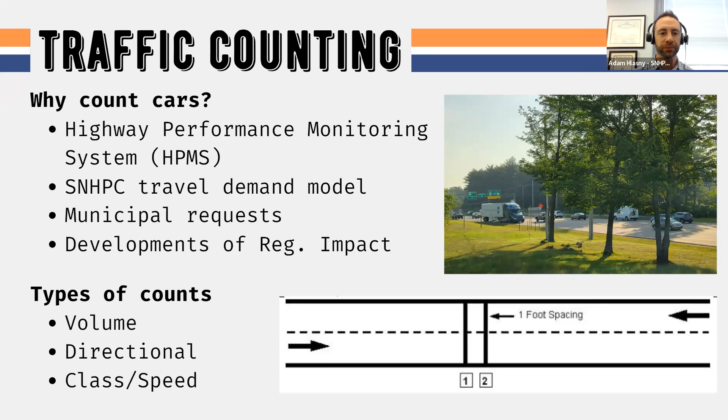Speed counts are another type that we do, often municipal or local requests to have a speed study done. On the left here, you see a map of our 2022 counts. We have about 1,200 total count sites, and they're on a 3-year cycle. So we do about 400 a year, roughly half DOT and half for the SNHPC model.

The field season began about 2 weeks ago. We start right after the snow melts and go right into November. We do roughly 20 counts each week, and we often get 17 or 18 of those that are successful. Usually a couple come up for various reasons—street sweepers sometimes knock the tube out, so we have to redo some—but we generally get about 18 successes a week.

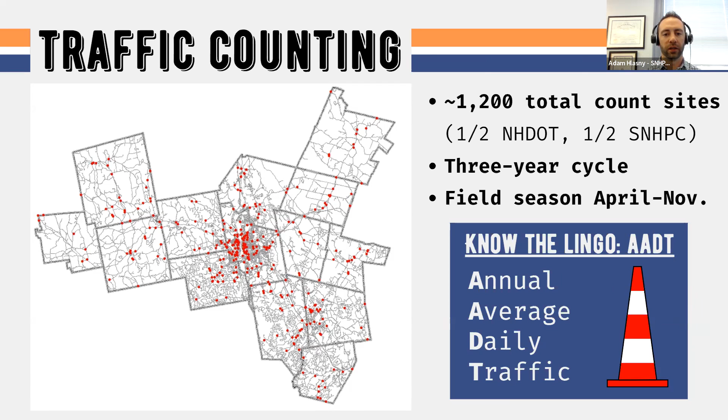AADT is the annual average daily traffic. That's the standard measurement of how many vehicles use a specific stretch of roadway in a given day. That's how we measure and compare the AADT across any count in our region.

This is an example of a field sheet that we take out with us. I prepare these every week. We have a list of the locations, as you can see here. We put the AADT on the sheet, so the folks installing the counts have an idea of what to expect when they're out in the field.

It's a safety precaution, as well as when we download the data, we can see at a glance how close we are to the past AADT. So if we're counting a road that 3 years ago had only 1,000 vehicles and we get 3,000 this year, chances are something went wrong with the count and we have to redo it. We typically try to get within 10 or 20% of the volume of the previous year.

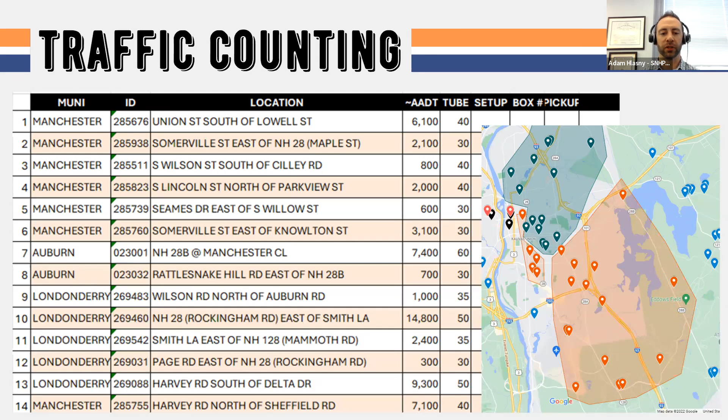Over here is a map—I tend to print these out before each week of counting. Before we head out, we make the most efficient route so the field team doesn't waste time looking for the best way to go between all the count locations.

So we have a traffic count web map. If you go to our website, here's how you would find it: it's under transportation, traffic counts, and then there's the web map. I believe this will take us there. For those of you who haven't seen this before, this is all of the counts that we do in our region. They are color coded.

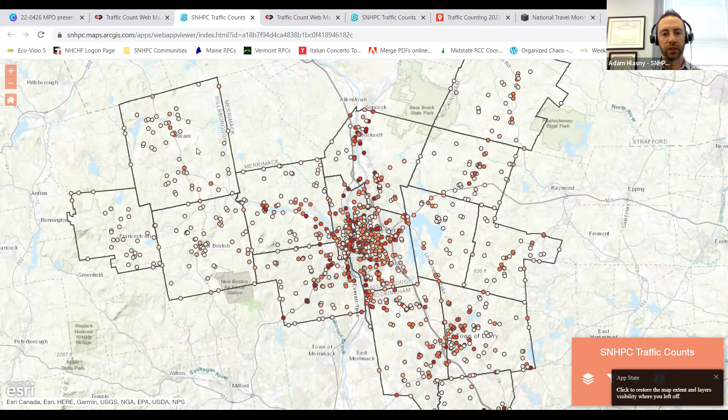The darker the red color here, the more volume. So I'll zoom in. And if you zoom in far enough, you can see the AADT on each count. You can see 1,500 here, 6,900. And I will show you one example that I find kind of interesting.

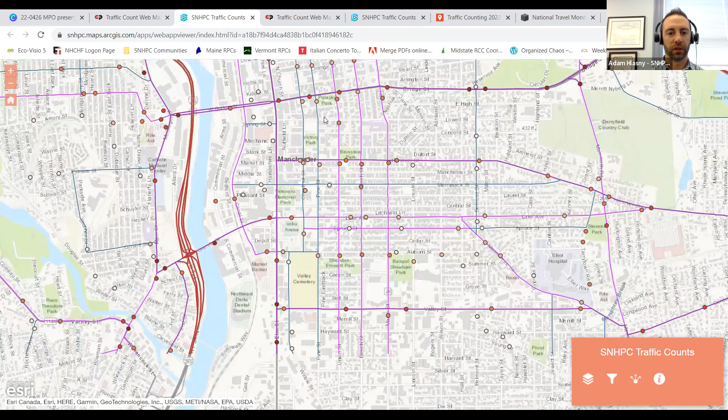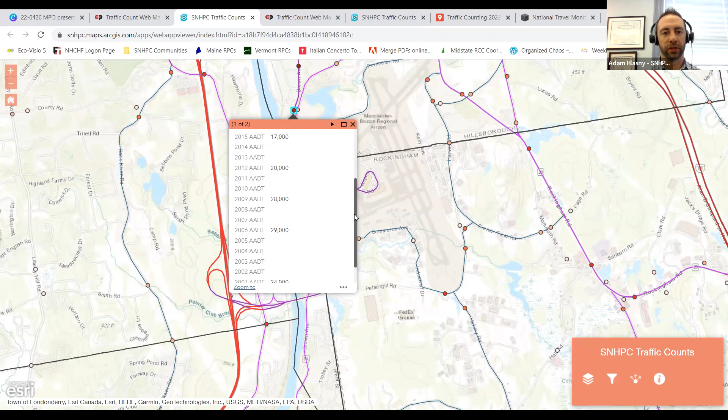Down here on Brown Ave, we have data that goes back all the way to 2000. In 2006, we had an AADT of 29,000 vehicles. After the airport access road, the Raymond Wieczorek Drive, opened, you can see the volumes went way down to 17,000 in 2015, and then it started to rise again in 2018. The 2019 and 2020 data are on their way—we don't have them up on the website just yet, but they're coming soon. This is an example of how this captures trends from the past couple of decades.

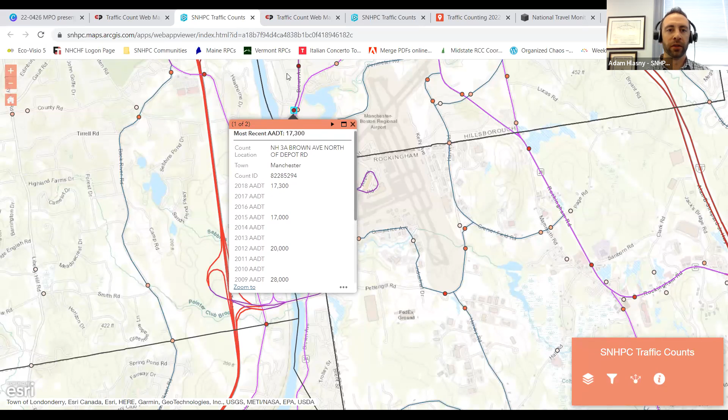Why do we count? Capturing seasonal trends—some of the trails I'll show you in a moment fluctuate quite a bit season to season. Also to justify investments in infrastructure or support grant applications, and to gauge event attendance. For instance, we've counted at the Manchester Car Show on Elm Street, before COVID obviously, to see how many people were attending that event.

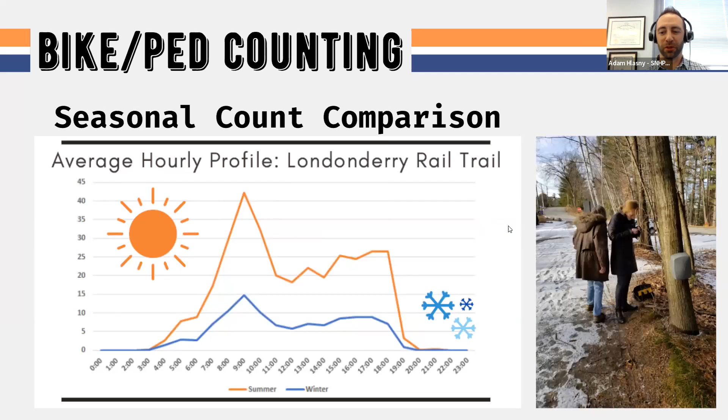And the picture - that's from Goffstown, I recognize it. It is, that one tree. We didn't have a Londonderry photo that I was happy with, so I just threw that one in there. Nice.

As I said, there are 3 tiers. We're going to count the top 10 annually, or preferably more than once a year, but at least annually. Tier 2 is biennial. Tier 3 is sometimes a one-off town request or something we did that's not as popular a site, so that will just be as needed.

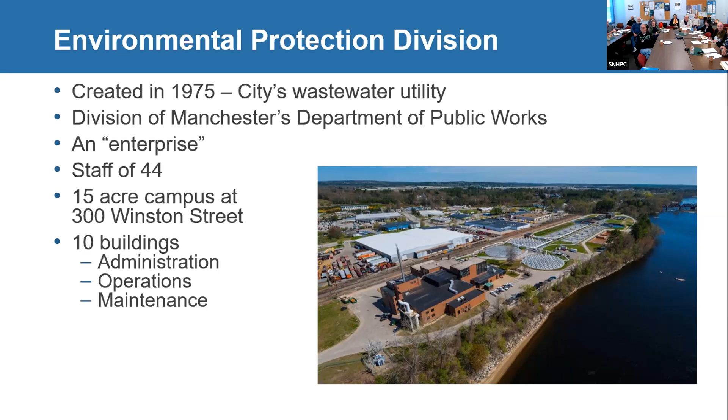I mentioned I'm the Chief Engineer of City of Manchester's Environmental Protection Division. That's really the city's wastewater utility. We were created in 1975 and we're a Division of Public Works. We're an enterprise, meaning we don't take any tax dollars. We're financed from our sewer user rates. We have a beautiful campus at the banks of the Merrimack, 15 acres, 10 buildings, staff of 44, admin, ops, maintenance. We're all down there along the beautiful banks of the Merrimack.

Hey Fred, maybe you should very quickly talk about the use of your effluent as cooling water. Oh, I could talk about that, since you like that, I'll go back to that. We're really a water reclamation facility. Peter mentioned about reuse, but I stated the most important reuse: we put all our water back in the river, and 500,000 people take that water out and use it for drinking water. That's a great accomplishment. What Peter mentioned is we actually have a secondary use, in that there's a power plant in Londonderry, a gas-fired power plant, that takes, using the measurement MGD, million gallons a day, 5 MGD from us to use for cooling water. To put that in perspective, that 5 MGD is bigger than 98% of the treatment plants in northern New England, so it's a very large volume of water. The best thing about it is we double dip on it: we sell them that water, about 75% evaporates, 25% comes back in the sewer system, and we charge them again. So it's a win-win situation.

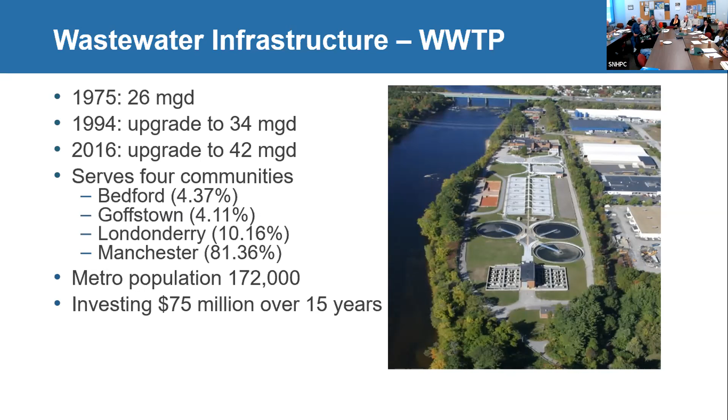Again, we have to get all the wastewater to the treatment plant. So we have 390 miles of sewer. The technical term we use for that is a lot of pipe. A big thing about it is over 100 miles of it is over 100 years old, and we'll talk about that old infrastructure that we have.

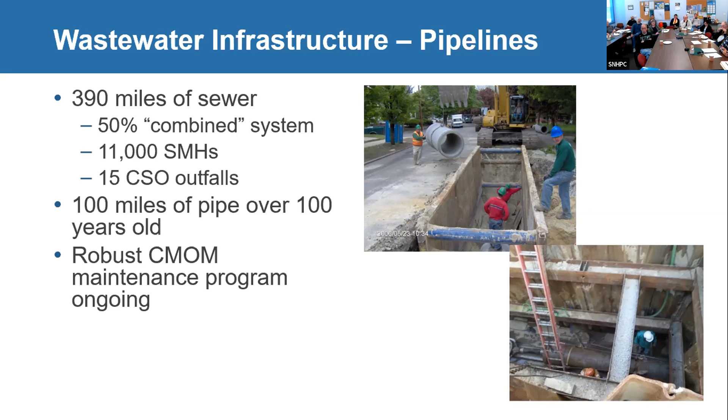But I'm very proud to say we have a robust program we call CMOM. It's a maintenance program for the sewer. We invest about $3.5 million a year in maintaining that system, and that's a sustainable program. We're in year 12 of it. We take great pride in sustainability, because that's very important in our business culture, in our industry. So we have a very robust maintenance program.

We also have to get the flows to the plant, so we have a bunch of pump stations. We have 12 of them out there, from little tiny stations to huge stations, old stations from the mid-70s to recent ones, all part of our infrastructure.

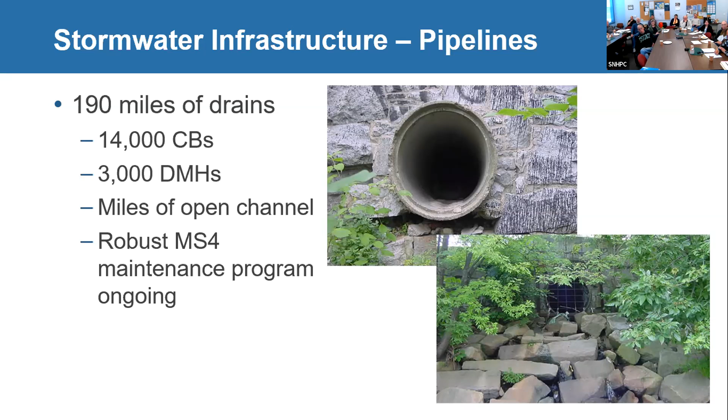We also take care of stormwater or drainage for the city. That's yet another 190 miles of pipe, 14,000 catch basins, 3,000 drain manholes. Again, a ton of infrastructure for us to own, operate, and maintain. But similar to CMOM, we have a robust maintenance program ongoing for stormwater, called MS4. We're mimicking the success we've had at CMOM, and I'm very proud, we're on year 5 for MS4. So again, sustainable maintenance programs.

We also have several urban ponds in town and waterways. Believe it or not, through MS4, we are now regulating the water quality in these ponds. We have Crystal Lake, Dorrs Pond, Pine Island Pond, Stevens Pond. Stevens Pond is my favorite. If you know where it is, it's right where 93 and 101 meet, and there's a pond underneath. All that waste from the road discharges into that pond, but they want us responsible for water quality. So again, a huge challenge there.

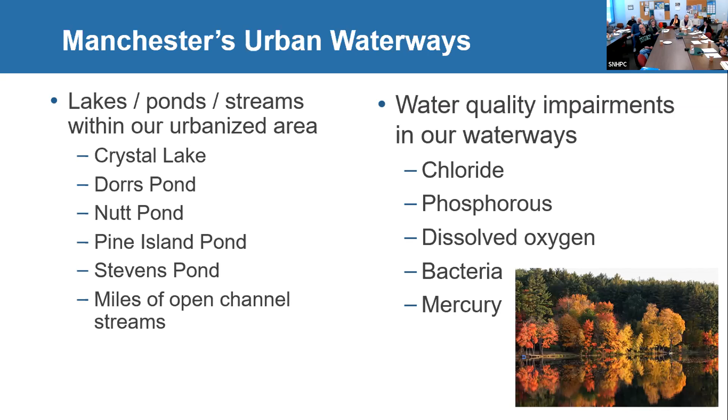Impairments, chlorides, that's salt. Where's all the salt in Stevens Pond come from? Route 93 that goes over it. Phosphorus, dissolved oxygen issues. So a lot of challenges.

So when I talk about infrastructure, let me put it in perspective. In the city of Manchester, we have over 1,000 miles of buried pipe. That's from here to Boston 10 times. Manchester Water Works has 500 miles of water main. Public Works has 190 miles of drainage. EPD has 390 miles of sewer. That's 1,000 miles total.

250 miles of that is over 100 years old, aging and failing infrastructure. That equipment has reached the end of its useful life. Do you have any appliance at home that's lasted 100 years? I think not. And again, this is buried in some pretty harsh environment.

So look, Fred, that doesn't even count the gas mains that are under the city streets. That's correct. The conduits carrying telephone conversations and data. All important infrastructure, private infrastructure for all the utilities, but you are equally as important. And you hear all about aging and failing infrastructure with bridges and roads.

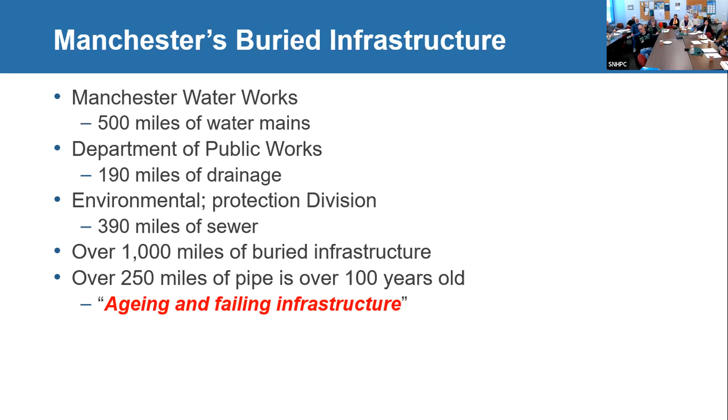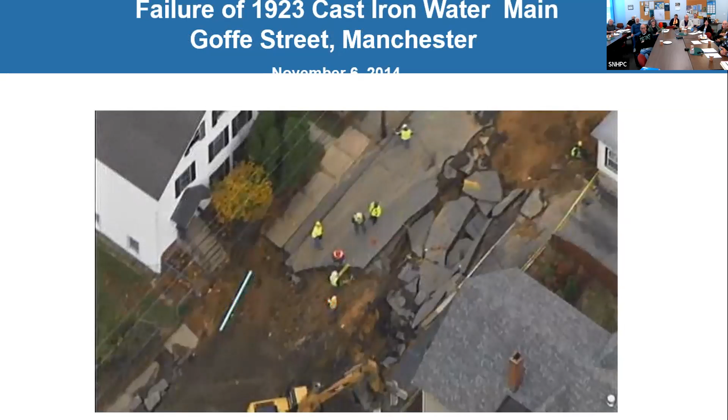Well, let me show you what our aging and failing infrastructure looks like. It looks like a road collapsing like that. This is a 1923 cast iron main failing in 2014. That's the overhead view. I like the up close and personal view. That looks like a war, does it not? So again, that's a failed water main.

Millions of gallons came gushing out of that, very high pressure. Not only did it take out the road, as Peter mentioned, every utility in that road we had to replace. Gas, sewer, drainage.

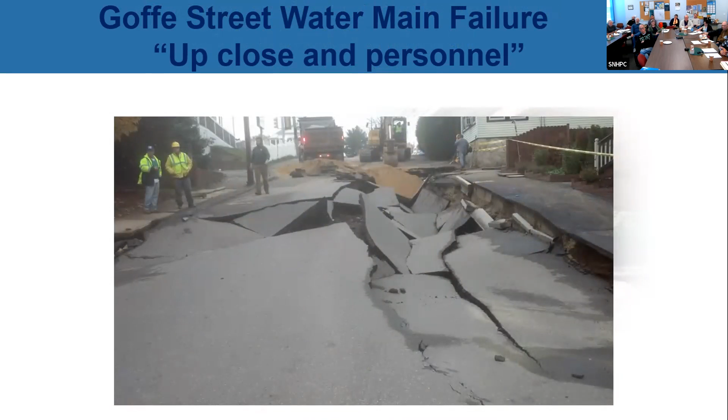This was Kennard Road near McIntyre ski area. Poor guy's going down plowing, all of a sudden bang, he goes in the sinkhole. Again, a failed water main. It took 2 heavy-duty tow trucks to drag that baby out because it was full of sand. Imagine how hard it is, and it's in the middle of winter, you're freezing cold. Nothing easy.

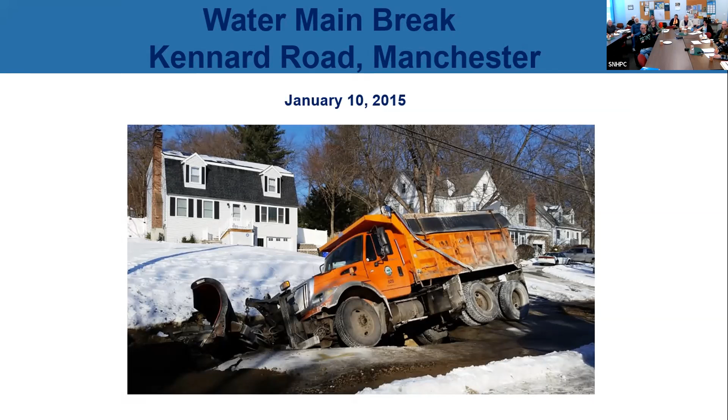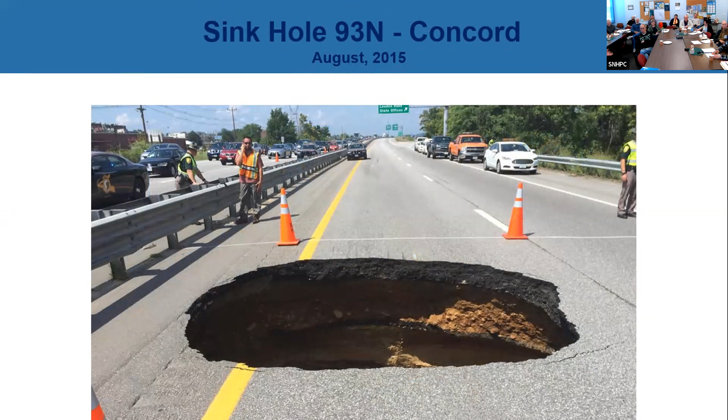This is Route 93 in Concord. Can you imagine that? We actually have pipes under the Merrimack, and we're working now with DOT to rehab one this spring because we want to prevent this. I mean, you had to shut down 93 North. What kind of catastrophe is that?

And as Peter knows, Murphy's Law, when does that pipe break? Memorial Day weekend or something, right? What kind of catastrophe would we have Memorial Day weekend if we had to shut down 93 North?

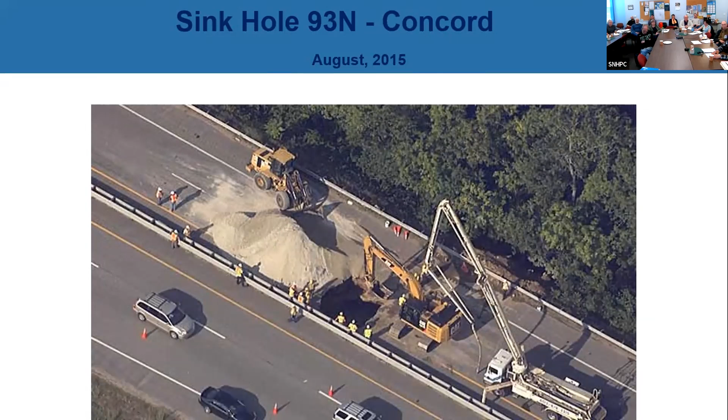This is my favorite from Manchester. Imagine being the poor guy in the red car, waking up in the morning, going out and saying, what happened there? Water main break in 2012.

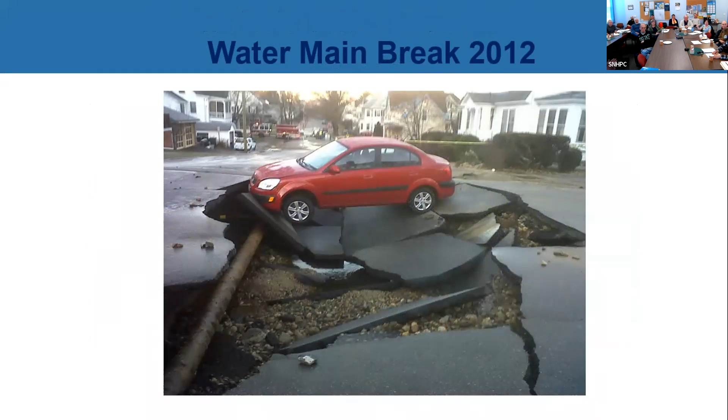So that's infrastructure, aging and failing infrastructure. That's one of our themes you should take away from here. The other theme is the state of the state. What I did was merge a couple of presentations to enlighten, inform, and entertain.

The biggest things our industry faces: aging and failing infrastructure, and increased regulatory requirements. Everything we do at EPD is regulatory required, and we'll talk about that in the CSO work. MS4 permits cover phosphorus and everything in the ponds, federally regulated. CMOM is also a federally regulated program. So everything we do is federally regulated and mandated through more and more regulations.

Let me get on my soapbox a bit. We've all heard about PFAS. They're measuring that in parts per trillion. Can you believe that? Think of a sandbox in parts per trillion. Our science has advanced so much we can detect things at parts per trillion. What people don't realize is how costly it is to clean this up. People hear PFAS is bad for you, causes cancer, and we want zero. What they don't understand is zero is going to cost billions and billions of dollars.

Climate change, need I say more? We see that each and every day here. I've been at EPD for 16 years, and I've seen not one, not two, but three 100-year storms. I think those are supposed to happen once every 100 years. I don't know what's happened, but I've seen three in my time, and unfortunately, I see a little more coming.

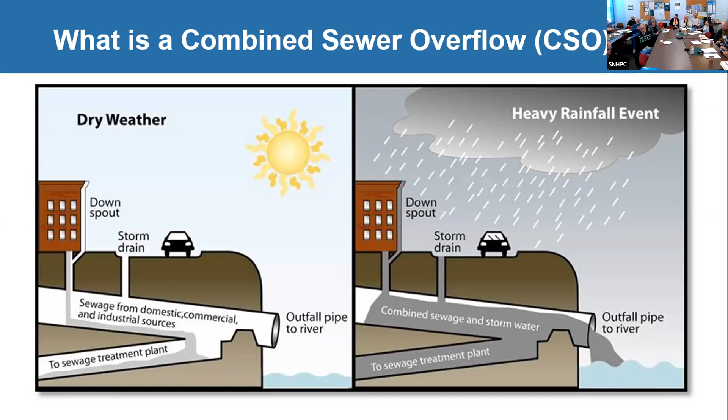There was no consideration of water quality or environmental stewardship in those days, and so the city of Manchester is faced with this, like a lot of other communities in the country. I get a little too animated here, you see, I get excited about this work. You asked me to make sewer sexy, I'm trying to do the best I can. So this is what a CSO really looks like.

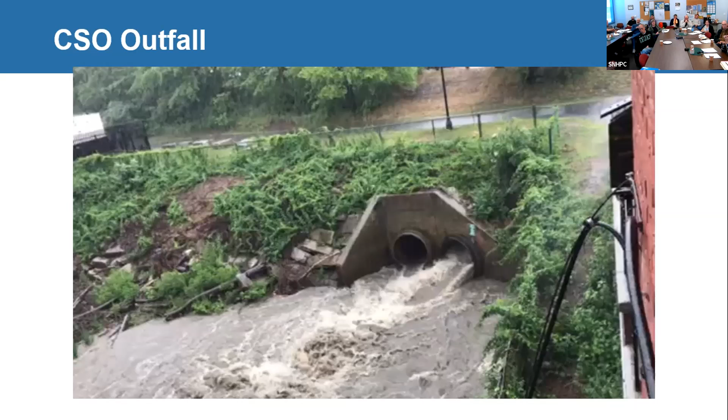That's a pipe right down in the millyard, discharging to the river, sending a combination of wastewater and stormwater. But let me tell you, when this pollutes, it's really what we call the first flush, because what comes out first contains all the sewage and drainage. All the water that comes out after that, 95, 98, 99% is stormwater, clean water. And the Merrimack River, believe it or not, can assimilate that type of pollution. We'll talk about that a little later. Well, that's what a CSO really looks like.

So our CSO history in Manchester: in 1994 they passed the Federal Clean Water Act CSO control policy. All these cities up and down the East Coast that were developed in the 1800s had to deal with this through mega projects. Like anyone, we did a bunch of engineering studies in the mid-90s, and then in 1999 we signed a federal consent order, a legal agreement with the Department of Justice, Environmental Protection Agency, and the city, that we would clean up these CSOs. It was a two-phase program: the first 10 years we worked up and down the west side of the Merrimack, and after that we did the east side.

So phase one was on the west side, 1999 to 2009. We had a nice office right down on Kelly Street. I remember Pete at many of those meetings there. Yes, with our friends Rich Davis and the guys.

So in 10 years, we spent $58 million on this program. We separated 15 drainage basins, 8 construction contracts. We rehabbed and replaced 53 miles of pipe. Think of that, it's from here all the way to Boston. A ton of pipe. What we really do is build a new drainage system, and the existing system was used for a sewer. So a massive 10-year, $58 million program.

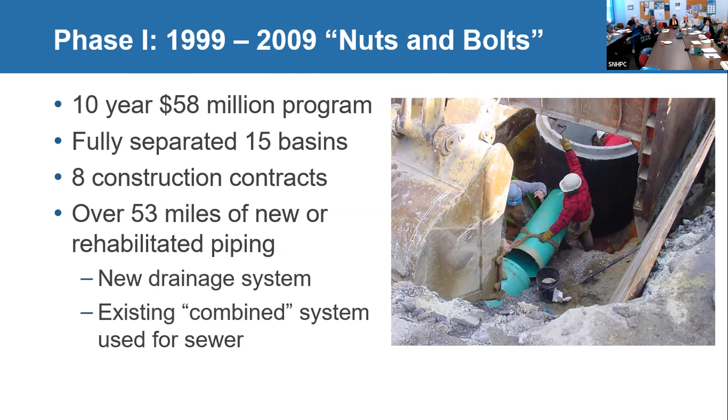And it was wildly successful. We reduced CSO discharge to the Merrimack River by 99%. We were only ordered by the court to get, this is an engineering measurement, a level of control. We're supposed to get a 3-month level of control. We got a 2-year level of control, meaning that our CSO should only discharge once every 2 years. Wildly successful, improving Merrimack River water quality. And most importantly, done on schedule and on budget. With the amount of projects we do, that's critical.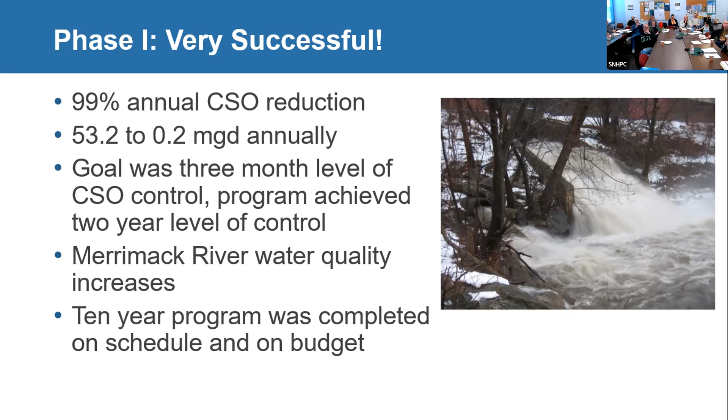But not only do we have the nuts and bolts, the concrete benefits, we end up with 26 miles of road reconstructed. 9 miles of new water, 14 miles of gas, 8 miles of curbing, 6 miles of sidewalk. So we're not talking small amounts. Just to walk 6 miles of sidewalks is a long walk, right? That's gonna take you a couple hours. A lot of sidewalks, all handicap pedestrian ramps.

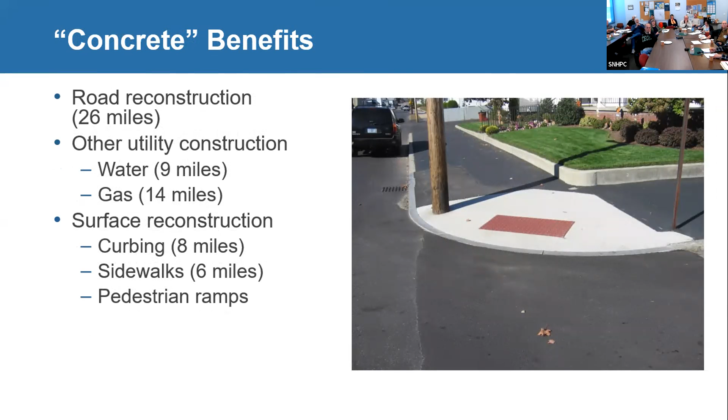So great concrete benefits, but we focused on more than that. Social benefits. We just don't want improved water quality. Like a lot of places, environmental justice is the new buzzword. You look at anything coming out from EPA, it's got environmental justice in that. But before that word was invented, I called it urban revitalization. We went into these inner city areas and improved them, used green infrastructure, ADA compliant, a positive impact on the local economy. So all social benefits, in addition to those concrete nuts and bolts that I shared with you.

So now we're done with the west side, it's time for phase two, go to the east side. I remember this, I was all pumped up. Peter remembers it probably. We finished the west side, we're gonna go kick ass on the east side. Let's go, let's go. We went into EPA with a two-phase program. Phase two is gonna be 165 million, phase three 220 million. Again, follows successful themes: infrastructure upgrades, urban revitalization, social justice.

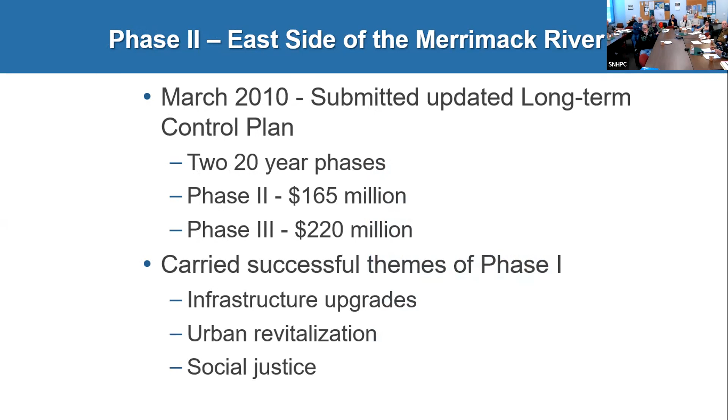But you know what, EPA, as they often do, didn't do anything. When I say didn't do anything, we spent almost $2 million on this big plan and report, and they didn't approve it, they didn't review it, they didn't do anything. We could not move forward without their concurrence. We weren't gonna make that type of investment. So we really had minimal interaction with EPA over the next 6 years. But we knew we had a long road in front of us. We knew we were gonna have to complete this work no matter what.

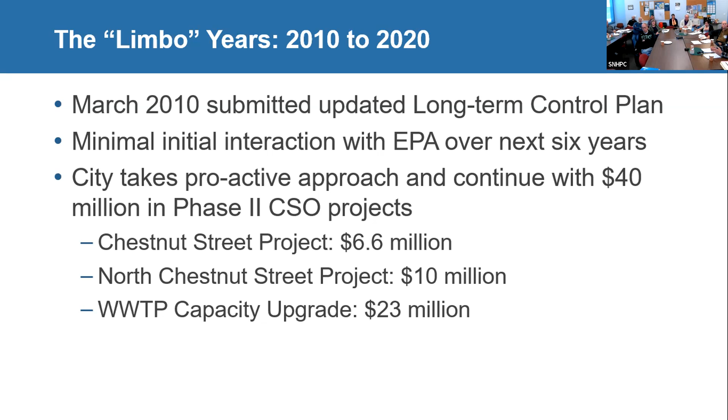So we moved forward with 3 contracts that we knew was gonna happen. We did the Chestnut Street project, the North Chestnut Street project, and then a project at the wastewater treatment plant. I don't know if you remember Chestnut Street, we actually started on Valley and went down Willow, then hopped on Chestnut and went all the way to Bridge Street. That took 5 years. Again, indicative of our projects and our culture, very slow moving, but a successful project.

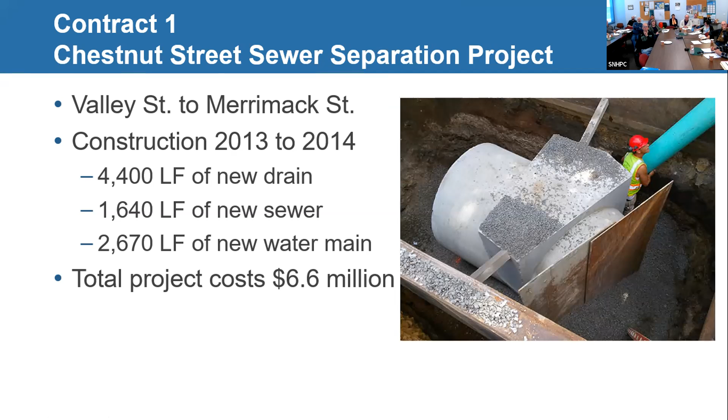From Valley to Merrimack Street, again, 4,000, 5,000, 6,000, 7,000, 8,000, close to 2 miles of various pipe, all down Chestnut Street. And this was big pipe. 72-inch OD, that's over 6 feet. The technical term we use is big ass pipe. That's what this is. We're 24 feet deep, right in front of the Verizon. Again, that took a tremendous amount of coordination.

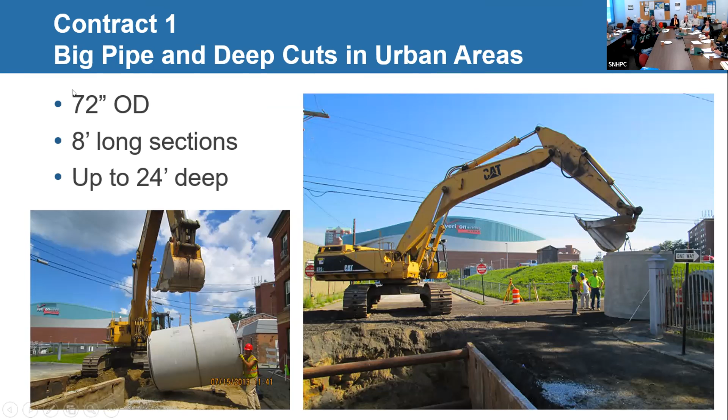I mentioned you can't close 93 on Memorial Day weekend. Verizon had all their events. We worked very closely with them to make sure traffic got in and out. But when you have a hole 24 feet deep, that's a big hole, and you're putting pipe 6 feet in diameter in. Again, all big stuff.

Here's another picture of it. This is actually contract 2, where we went from Merrimack Street all the way up to Bridge Street. Again, 3 years, $10 million. I'm getting a headache, 15,000 feet, 17,000 feet of blue pipe. So that's 3 miles of various pipe within that project.

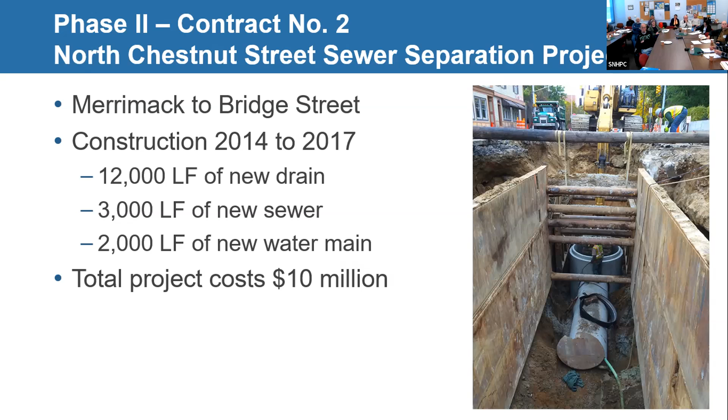Again, we leveraged this project like we did all of them. We talked about bike lanes earlier - the first bike lanes in the city were done under this project, and we leverage all these projects to build on that. If you see the bike lanes on Mammoth Road that start at the 293 overpass and go all the way to Londonderry, that was an EPD project. If you see the bike lanes on Wellington Road that go all the way to exit 1, those were all done on an EPD project. Again, we try to leverage our dollars, and bike lanes are a great example.

But again, complete infrastructure upgrade - new water, gas, fiber optics, decorative crosswalks. You go in front of the Palace Theater, those nice fake red brick crosswalks? We did those. Again, when we put something back together, we want to leverage those. Even here on the west side, behind Wolf Park, I was so proud. When I was a kid, there used to be horseshoe pits back there. I went back there, we revitalized it when we went through with a pipeline. So again, we try to do the best we can for the city.

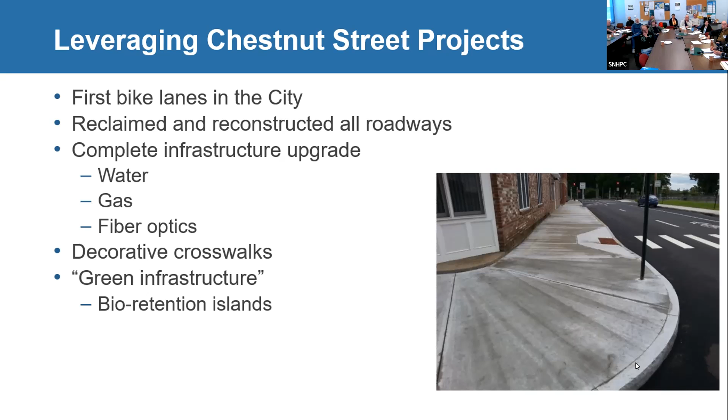We did a big project at the treatment plant. Again, I say regulatory driven - this is to remove phosphorus. This is part 2. It's costing us $25 million to remove phosphorus before we discharge into the Merrimack River. Again, for those who don't know, phosphorus is a nutrient that promotes algae growth. I haven't seen any algae in the Merrimack River, and I've lived here a long time.

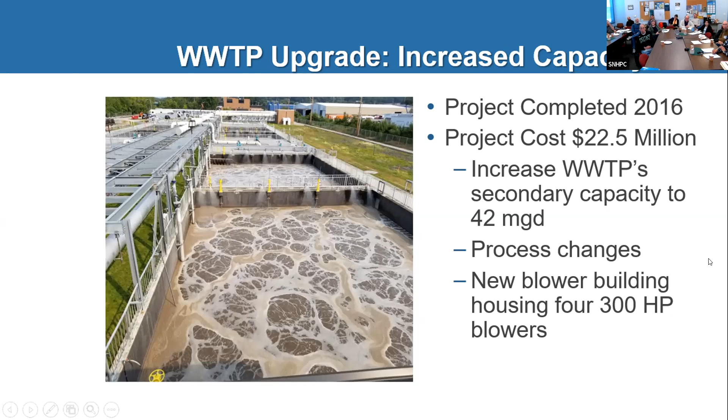We'll talk about the financial viability of some of these regulatory requirements. But either way, we have PC Construction - I was at the monthly progress meeting today at the plant, a 3-year project, $25 million, trying to keep that on schedule and on budget. So phase two negotiations, just going through a 10-year time frame. We submitted the long-term control plan in March of 2010, and it's September 28, 2020.

So 10 and a half years later, we finally have a signed consent decree. Again, that's how slowly these wheels move at times. But as I said, we were proactive at the beginning of it, so we got a few contracts done. But finally, 2 years ago, we had a concrete program. So now that phase two that we said was gonna be $160 million - 10 years later, look at that number, a lot more than 160 million. And I'll get into why that number is so big.

Well, the reason it's so big is the first number under it, the $191 million - that's for a big tunnel we're gonna build that I'll get into in a minute. But again, $190 million for the Cemetery Brook tunnel, $80 million sewer separation, $30 million Christian Brook, $25 million to wrap up that phosphorus project, $6 million in assessments. So again, it adds up to $338 million. That is a mega project, one of the biggest projects the city's ever undertaken in its history, period.

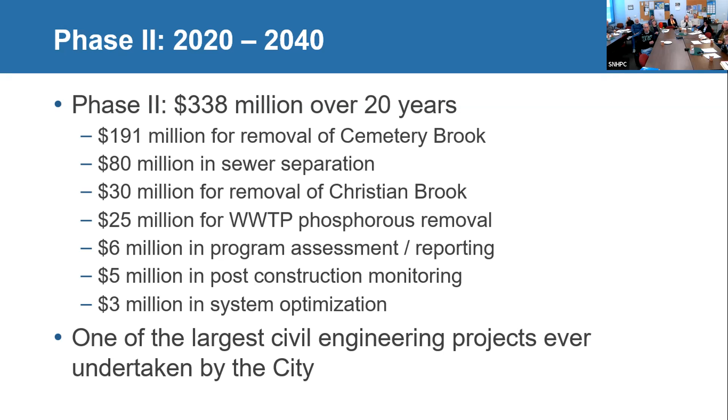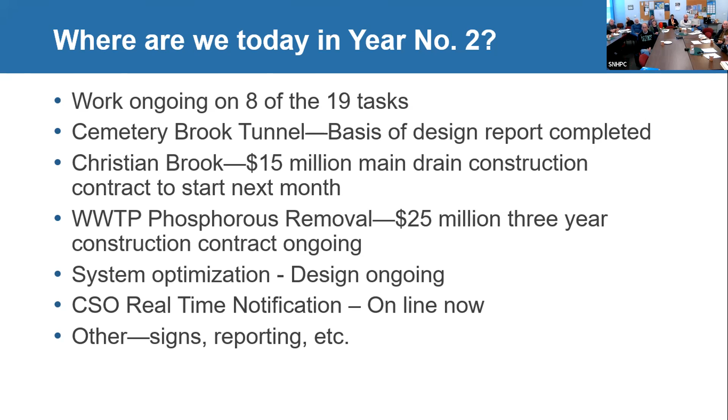So now we're in year 2 of this, and where are we? Well, I'm knee deep in paperwork - if you go to my office, I've got reports and drawings and contracts everywhere. So that proves there's a lot of work going on. Cemetery Brook Tunnel - we're just literally submitting to the EPA the basis of design report as I speak. And I'll share with you, because that's really the crown jewel project of the CSO program. The phosphorus removal I mentioned is ongoing at the plant with PC Construction. System optimization - it's just a tiny $3 million project that's going to require us to dig a 25-foot hole between Fisher Cat Stadium and the Merrimack River. So again, just another simple project we got to do there. All kinds of other things.

As I mentioned, the crown jewel is really Cemetery Brook. I had started at Stevens Pond talking about this - let me go back. Cemetery Brook is the largest drainage basin in the city, covering 4,500 acres. It creates the most CSO discharges around. Stevens Pond is where Cemetery Brook starts, and that's a natural drainage basin for the city. It goes right down the 17th hole at Derryfield, goes under East Side Plaza, under Mammoth Road, and is underground through the rest of the city.

Let me highlight it right from there - downstream from Mammoth Road is the Elliot Hospital. The Elliot Hospital has a parking garage off of Massabesic Street. That parking garage actually straddles Cemetery Brook - it's in the ground underneath the ground level parking. And it is super high. If you're ever in that garage, next time, think about it.

It's super high so that an excavator, a construction crew can go into that parking garage and dig down to Cemetery Brook, at least that few hundred feet that's straddled by the parking garage. So that's a level of detail we go into, and as Peter mentioned, we work with the developer on that specific height so we could go in and work on that.

And again, we want to be accommodating. Do we want to say no to an expansion at Elliot Hospital? No way, right? We want to work with these guys on that. And actually, the new Hilton Tru Hotel downtown off of Commercial Street, exact same thing. They're over the edge of our CSO regulator, and again we work with these people. We don't want to inhibit the development of the city, we want to promote it.

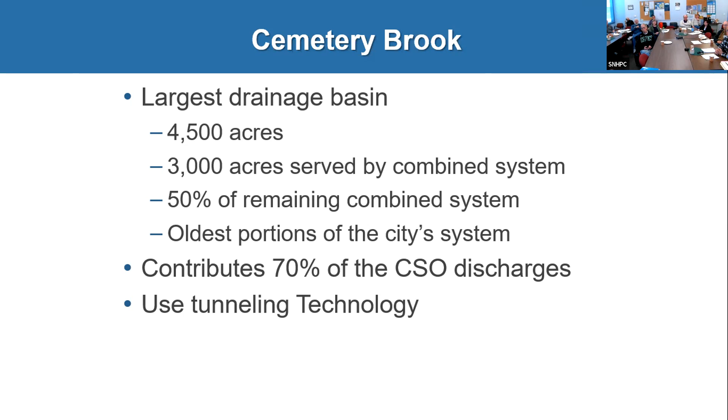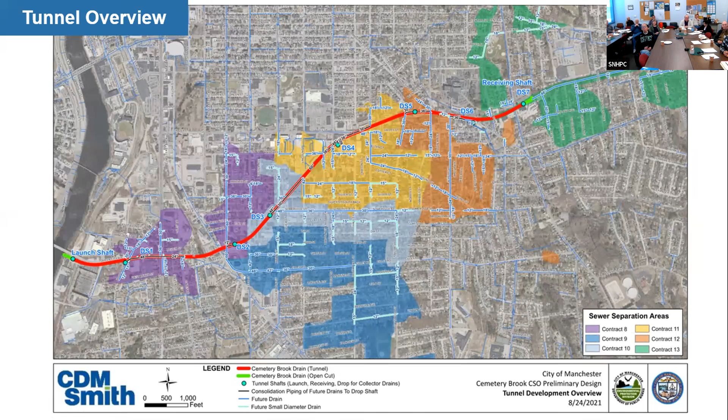Because this is such a big project, the easiest thing for us to do is build a tunnel. So we're building a tunnel. What's the tunnel look like? Well, it's going to start just south of the Queen City Bridge and go underground for almost 2 miles. It's going to pop up just east of Mammoth Road, next to the old CVS, which is across the street from the new CVS. So that's 2 miles, and now let me put things in better perspective.

So that tunnel is going to be 12-foot diameter - that's even bigger than this ceiling. It's going to be 30 to 80 feet deep, so again that's an 8-story building. That's going to be a big, deep tunnel. It's going to take us a year just to build the machine to drill the tunnel. So we are going to get a tunnel boring machine. It's going to go in right across from the railroad tracks next to the Merrimack River, the Queen City Bridge, and it's going to start tunneling - 12-foot diameter.

When they get a mile up here, everything still has to come out here. When we're working up here, 1.75 miles, you've got to go 1.75 miles to go work on the tunnel boring machine. When you're 1.7 miles out, all of this material still has to come backwards all the way here, because that's the only way out. So again, a huge construction project.

For those of you that remember all the old canals that used to be next to the mills, those were built to divert the water to power the mills. This project is on the same size and scope as a project like that - a mega project.

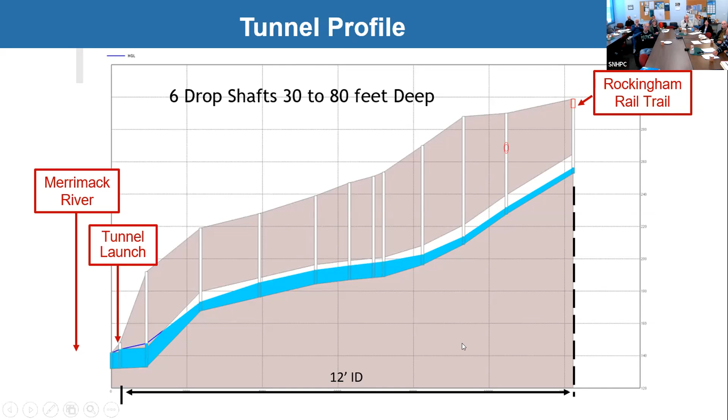So this has 6 drop shafts, 30 to 80 feet deep. Just to put things in perspective, some of these drop shafts are going to be 20 feet in diameter - that's from here to that wall, 80 feet deep. Again, when I use the term big ass, that's another big ass hole. Here's a picture of it, and here we go, way down deep. Let me see if I can look - so the bottom is at 230, and if I go all the way up there, it's 293. So this one's 63 feet deep. That's an example of what one of the drop shafts will look like.

Because not only do we have to let water into this, we have to let air out of it so you have capacity for water. So again, a huge engineering project.

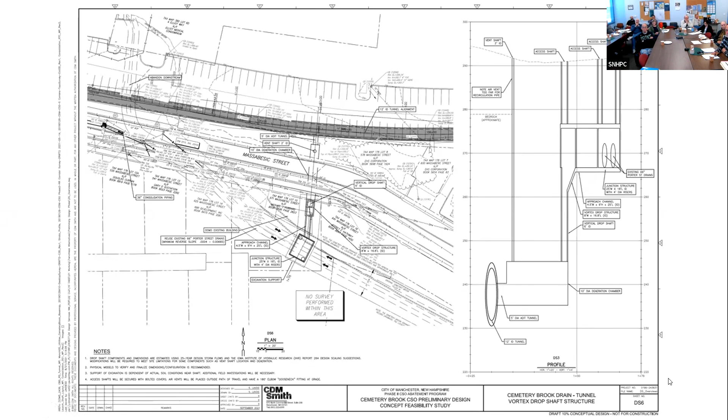Christian Brook, a little more manageable - just a couple of contracts, $30 million. We're separating a 25-acre basin. This part is going to go right in front of a good friend of mine's house, Mr. Capano, and we'll talk about that after - but for those from my kitchen window, yes, for those of you familiar with the area, we're going to be on North Street, and we'll go from North Street eastbound from Walnut, where Peter lives, all the way up to McIntyre Ski Area ultimately.

That's a 2-year project, and they're actually going to be out there working this tomorrow. Advance will be out there doing probes again to determine the exact level of rock beneath the surface. The contractors are going to start there Monday, May 16th on 2 fronts. So then there'll be another active construction project for us.

Are you paying to move Peter out of his house during this work? Well, I am going to change my email address so he can't email me every day.

I'll start that. So we have 2 contracts: the main drain, McIntyre down Smyth Road to North Street, and north all the way down to Walnut. Then we come back afterwards and do all the pipes coming off of this main drain. So again, that's another 2 years. And then we'll come back and do final paving in 2027. So again, that's 5 years out for us to do these projects.

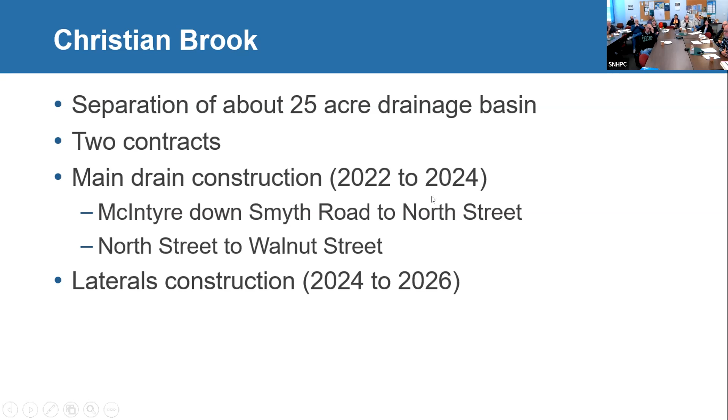It will be in this area. Again, when I talk about our industry and our culture, things move slowly. Most projects take this long because what you don't see is there's a study done first, then a design. So we're 2 years into this project already, and then we've got 5 years of construction ahead of us. So again, a 7-year lifespan for this project.

And then, believe it or not, we have a phase 3 somewhere down the road. As much as I'd like to stay around to watch it, I don't think I'll be around in 2040. And if you remember, I started the story in 1995. So again, we're 27 years into the story, and we still have a long ways to go. But believe it or not, we have an engineering report that identifies 5 CSO basins, 4 outfalls, 200 million dollars. But again, I don't know what it's going to be in 2040.

So who is paying for all of this? Well, I'm a Manchester resident now, so I know I'm going to be paying for some of it.

So now I'm going to just talk a little about rates, because I had this slide. We've been excellent with rates in Manchester. I've been with the city for 15 years, and we raised rates twice. When I first came on board, we were way behind, actually in the red. So we did some significant rate increases all the way through 2010. That was in preparation to start the CSO project. We're all ready to go. I told you, we're ready and raring to go.

And then it was limbo years for EPA. So under Mayor Gatsas, he was excellent. He said, Freddie, we're not starting that program, we're going to give some money back. He said fine, and we gave a 7% rate decrease. Has Eversource ever given you a rate decrease? At public service? I'm just saying our utility rocks. It is an example of it.

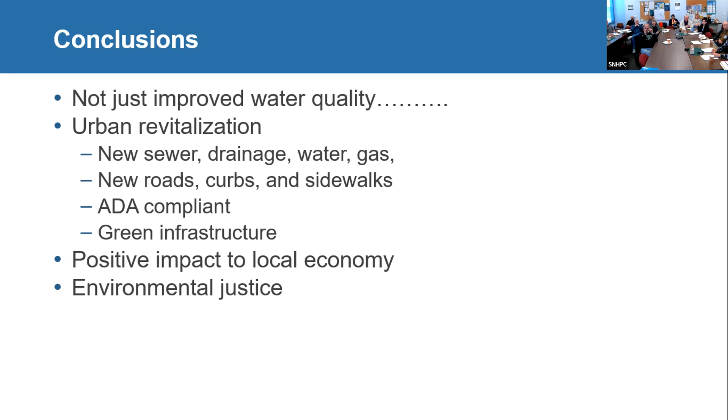Now I get on my soapbox one more time. Conclusion: we're investing 300 million in CSO mitigation. Our discharges in 2020 were 154 million gallons. The Merrimack River's flow was over 1 trillion gallons. So what we discharge, the raw sewage, is 1/100th of 1%—a very, very small thing.

And what they're concerned about is recreational activity on the river and that people's health could be impacted. But when it's pouring rain out, how many people are really out on the Merrimack River recreating? Maybe a few diehard fishermen, but I don't think the canoeists are out there, or people swimming or anything.

All the downstream water treatment plants have the technology to treat for CSOs—they've been doing it for decades, they were built that way. So again, is this a cost-effective measure to address water quality? We contribute 1/100th of 1% during wet weather times, and the assimilative capacity of the Merrimack River can take most of that.

So again, but you know what—it's kept me professionally employed, professionally challenged for my entire career. And we laugh about it, I say it's a regulatory driven industry. It really is. There's a whole community of construction contractors, equipment vendors, engineers, and municipalities like us who EPA have kept fat, dumb, and happy for a whole professional career.

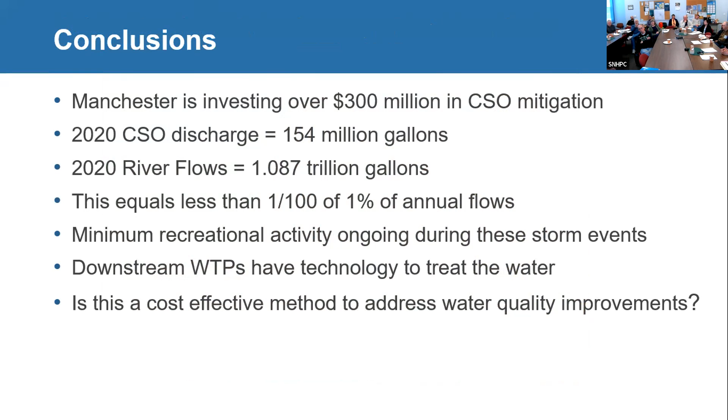But Fred, you've been at this long enough to see the transition from rivers being a dumping ground to rivers being a natural resource. So now you let me hit a home run with the next one. Oh—so that's what it used to look like.

And you are right. So what we're celebrating this year is the 50th anniversary of the Clean Water Act. The Clean Water Act was actually an amendment to legislation in 1972. This is one of the greatest engineering achievements ever in America—I put it up there with NASA putting a man on the moon, and with Eisenhower and the interstate highway system.

Randy Newman actually did a great song on it. So America came together, they recognized it. How many of you remember the Indian commercial with the tear coming down because of pollution? So it was really social consciousness—they had just rallied to stop the Vietnam War, and the next thing was the environment. And they looked around and saw rivers like this.

So the Clean Water Act provided money, the most important thing, to build wastewater treatment facilities all over America, because that was the biggest reason. They provided 90 cents on the dollar, and the state provided 5 cents on the dollar. So when the city of Manchester built their facility, the one I sit in the office in now, it was 95 cents on the dollar between the state and the feds. The city paid 5 cents. And you know what?